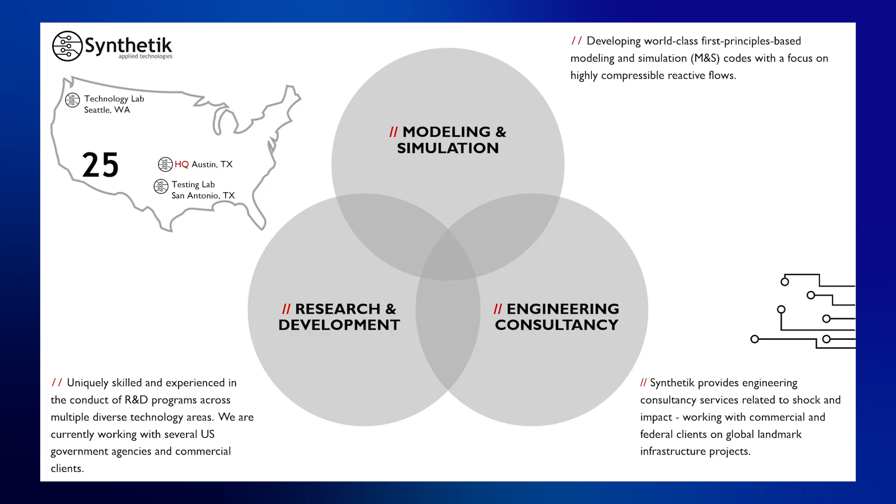And here is that aforementioned M&S team. You'll hear from each of my friends and colleagues as part of this briefing, and Jeff, Ben, and Barlev have done much of the heavy lifting in terms of the code development that you'll see today during the Phase 1 SBIR. And in my opinion, they've done an outstanding job, but I'll let you decide that.

I also wanted to acknowledge Mac, who you can see on the slide here, who worked with us when he was finishing his PhD before moving to a postdoc role at Stanford. He did much of the early work on the blastFEM code to get us in a position to write the successful Phase 1 SBIR application.

So here is a little bit of background and development history to set some context. Back in 2016, we developed a highly compressible flow solver that leveraged the OpenFOAM libraries, and we continued to extend and develop that code as an open source project. Earlier this year, we developed a stripped back, GPU accelerated and optimized version of that which was back compatible, under Dr. Jeff Heylmun, who you'll hear from later in the briefing.

And finally, as a natural progression of that work, we had a strong desire to work with MFEM in order to benefit from the higher order DG schemes, the GPU support, and the ability to run at exascale, pretty much everything that you've heard today. And the development of that code, blastFEM, is the subject of today's briefing.

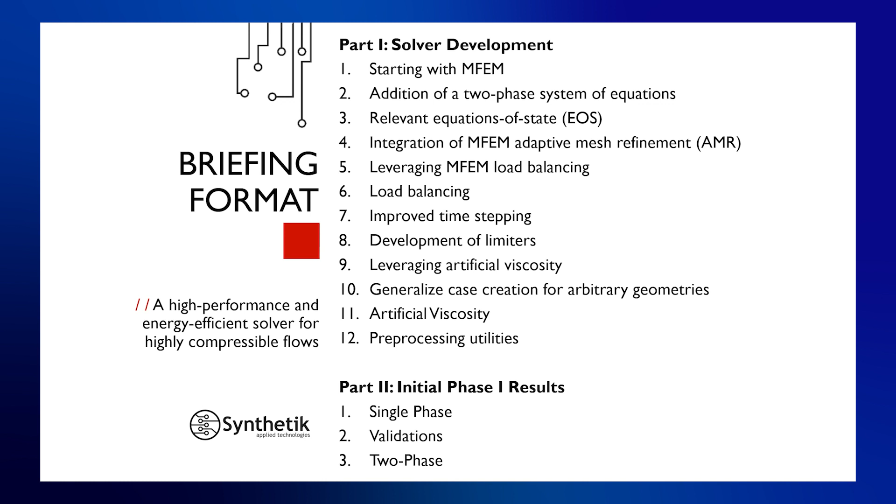So with that context and background set, this is the format that we're going to go through. Ben, Jeff, Peter, and Barlev will pick up different sections of part one and give you a break from my slightly monotone delivery. And finally, Barlev will go through part two, which will be some of our initial Phase 1 results, and then any questions. But Ben, over to you.

Thanks, Tim. So first, we'll briefly cover some of the theory behind blastFEM's development, and then we'll look at some of the features that we've included. blastFEM uses the compressible Euler transport equations. This is a system of hyperbolic nonlinear PDEs, and we use the discontinuous Galerkin formulation, which is an ideal setup for solving highly compressible flows where you have shocks or discontinuities.

As a starting point for development, we used MFEM's example 18 code, which implements exactly this: the single phase Euler equations using discontinuous Galerkin. Next slide, please. We then wanted to extend this to the two-phase Euler system by adding the transport equations for a volume fraction alpha and splitting the density transport into a partial density, one for each gas phase. You can see what that looks like in these equations here. We then had to close the system of governing equations by adding an additional equation for the total density, rho, which we show there.

And that's based on the partial densities and that volume fraction alpha. And finally, we add an additional equation of state, which relates the density, the pressure, and the energy.

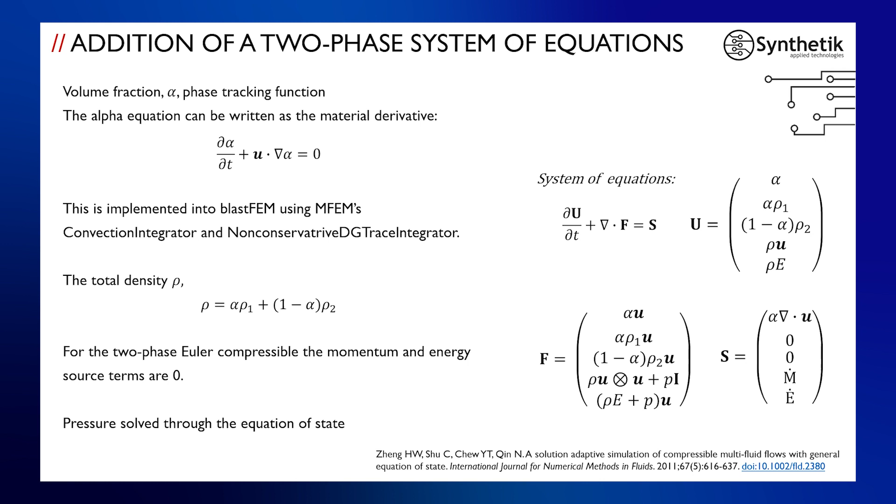Next slide, please. So I mentioned the equations of state. So we've implemented a few different options, including the usual ideal gas equation of state, which I'm sure everyone's familiar with, as well as the stiffened gas equation of state and the van der Waals equations of state. And these are easily selectable by the user, and you can use different equations of state choices for different gases within the same simulation. And we can also easily extend this framework to include a wider selection of equations of state as needed.

Next slide, please. Now, one of the more powerful tools we have at hand for improving the performance of blastFEM is the use of adaptive mesh refinement. That's already available within MFEM's capabilities. So we went ahead and used that so we can add refinement where we have regions of strong pressure or density gradients, and we can coarsen other regions. We can also easily use this AMR to refine near the initial conditions where you have strong gradients. So in this case, where we have an initial region of high pressure, we can refine around that to start with. Next slide, please.

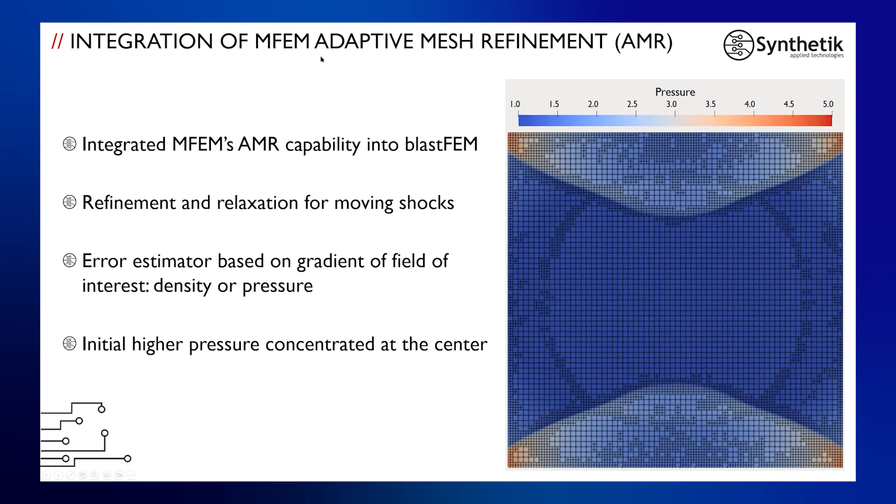Thank you. So in addition to AMR, we can further improve our performance by leveraging MFEM's load balancing features when you're running in parallel. So here we show a comparison of a few different cases. We have uniform refinement on the left. We have AMR without load balancing for the same simulation setup. And you can see already with AMR and no load balancing, we have about a 3 times speed up.

And then finally, we can introduce load balancing as well. And you can see the comparison between no AMR to AMR with load balancing, we have over a 5 times speed up. And so that's just a sort of low-hanging fruit for really improving the performance of blastFEM. This case here was a pretty simple case where we ran it on 12 CPUs with just first-order basis functions, but we can extend the size of this pretty easily as well.

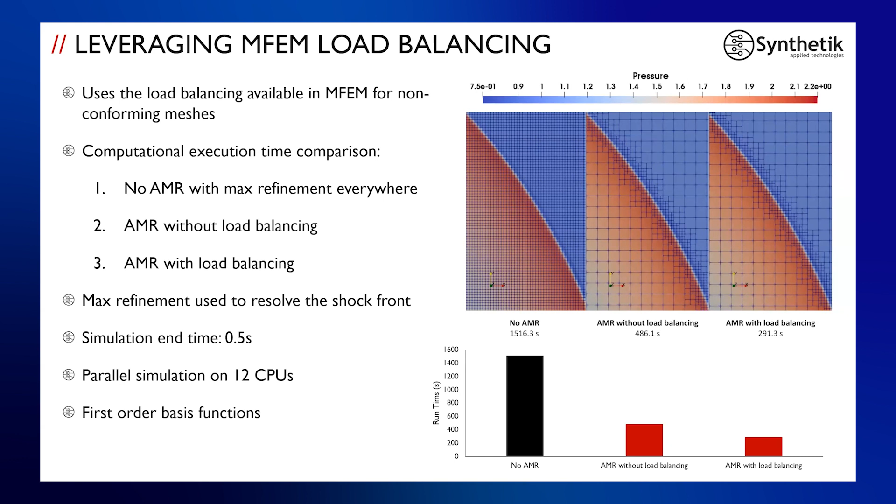Next slide, please. One small change which we made was to improve the time stepping method. So rather than using the smallest element size and the largest velocity over the entire domain, we can look at each element independently. So we can grab that element size and we can look at the velocity inside that element and look at that ratio for all elements and use that to select our time step. And that just helps us to prevent from over constraining the time step, which you might run into with some cases. Next slide, please.

So in some cases, in high order FEM with strong shocks and gradients, you can run into numerical instabilities. This can include oscillations or unphysical states where you have negative densities and pressures, or you can have poor interactions with boundary conditions. And we can help to mitigate this by the use of shock capturing limiters, which is where you place a limit on how much the solution can vary within the element, how much it varies from the average value within that element. And so we based this work on literature, and we are also able to provide the user with input to select how strong they want that limiter to be, or the user can disable the limiter as needed.

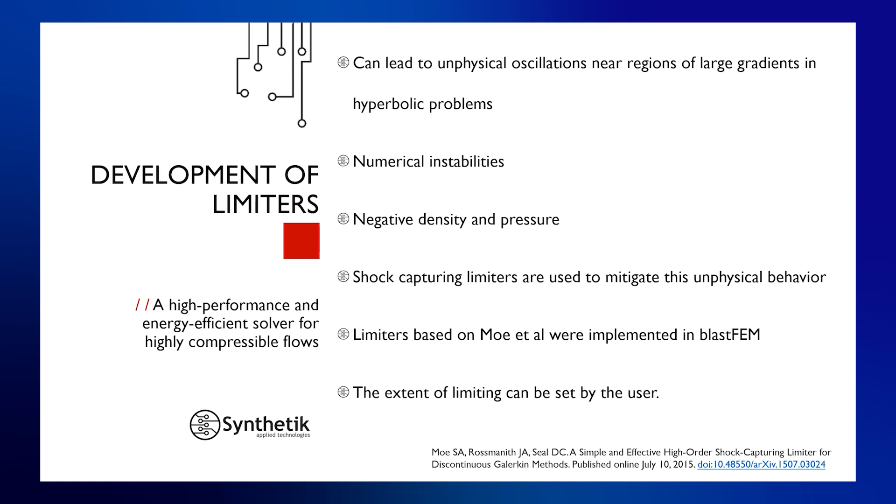Next slide, please. And in addition to the limiters, we have another option to improve the stability, which is artificial viscosity. So for high order FEM schemes where you have shock fronts or discontinuities which you want to track, you also want to be able to resolve that shock within the element itself. And artificial viscosity helps to stabilize that sort of system. So for this, we followed literature as well.

We used a method where we take our solution field, we project that solution down to a lower order field, and by taking the difference between those two fields, that gives us an indication of where you have strong gradients or discontinuities. Using that indicator, we can then apply viscosity to those regions of the domain. And that viscosity is based on the cell size and the basis function order.

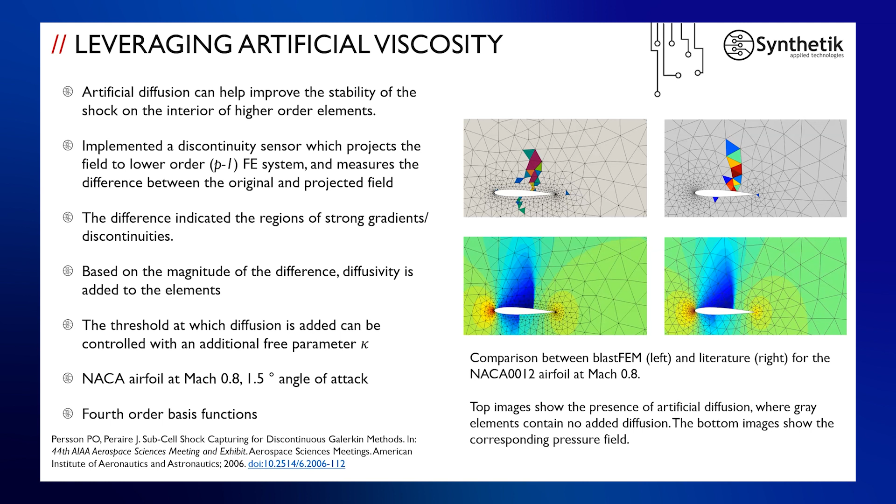Next slide, please. And with that, I will hand it over to Peter for looking at case creation.

Hey, thanks, Ben. So during the first phase of this program, and really as part of making MFEM more accessible to users modeling industrial flows more broadly, we wanted to quickly prototype a CAD integrated workflow. So as such, we adapted our SketchUp to Gmsh extension for use with MFEM. This extension, it's available for free on the SketchUp extension warehouse, essentially converts 3D CAD geometries into valid Gmsh grid generation input files. Conveniently, boundary names, desired element edge lengths, these can all be applied within SketchUp.

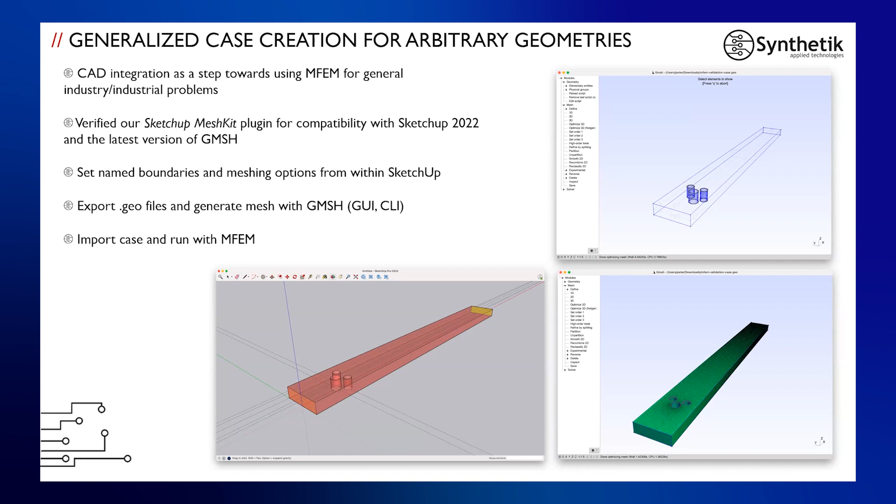We also developed an import utility to import an applied boundary and the initial conditions to the MFEM cases of interest that we're running. This capability, we hope, will provide utility to the MFEM user community, and it's one that we use to support much of our commercial work. So with that, Dr. Jeff Heylmun will walk you through some of the work that we've done creating rich input files and integration within MFEM.

Thanks, Peter. So in addition to the numerical schemes that Ben talked about, we also have had a large focus on simplifying and generalizing the inputs for arbitrary case creation. So this is a sample input, and it's broken down into a couple different sections. So we have our controls, our mesh schemes, phases, and initial conditions. So the control section controls things like the end time, the write interval, and visualization method. These would typically be put in through command line.

For mesh generation, we focus primarily on Gmsh. So if that's used, you can construct your mesh using named boundaries, which can then be used to specify boundary conditions by name. This is also where order and adaptive mesh refinement procedures are specified. Next, you can see the specification of the flux schemes as well as the ODE solvers and the limiting coefficients.

For the phases, this is going to be a two-phase simulation. So we have the first phase, which is going to be an ideal gas, and the second phase, which is stiffened gas. And you can see the parameters specified for both of those. And then finally, we have our initial conditions, which is a combination of an initial uniform or default value for all the fields, and then a selection of simple shapes like spheres, cylinders, or rectangles for different fields. And with that, Barlev will now show some results.

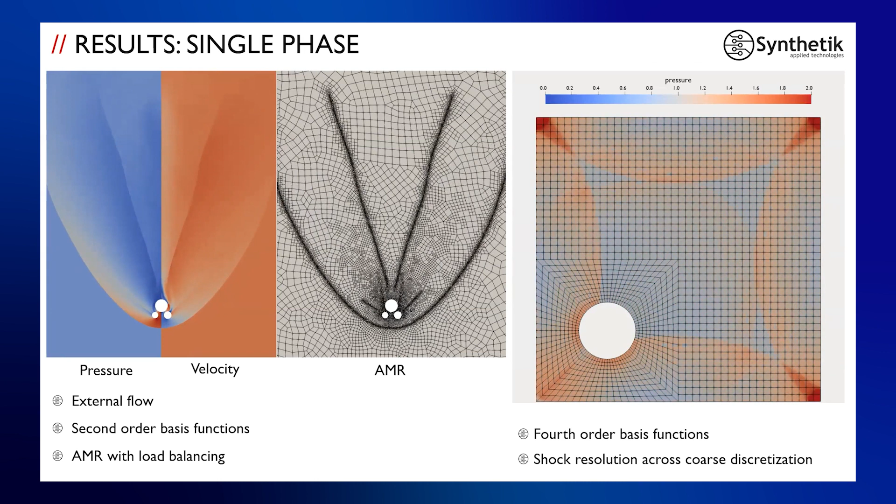Thank you, Jeff. So with the work developed and as described by my colleagues, I'm going to walk you through some of the results that we've gotten with our development work. So first, single phase results. The simulation on the left is an external flow over an arbitrary geometry that was meshed in Gmsh and then imported to be used with our solver. So the flow here is about Mach 2.5. We have a velocity inlet boundary condition at the bottom there, and outflow extrapolated boundary conditions on either side and on the top, and of course a wall boundary condition for the geometry in question.

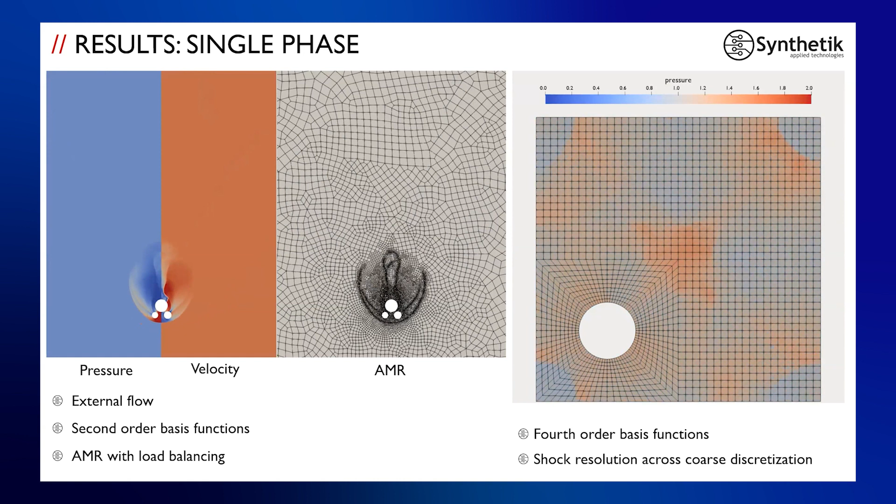This was done with the second order basis function and AMR with load balancing. So you can see that adaptive mesh refinement resolved the shocks in that case. On the right, we have a box essentially with a circular obstruction. So all boundaries here are set with the wall boundary conditions, no penetration. And we've initialized the center with a high pressure in the domain. And you can see that the shock is caused because of that pressure normalization.

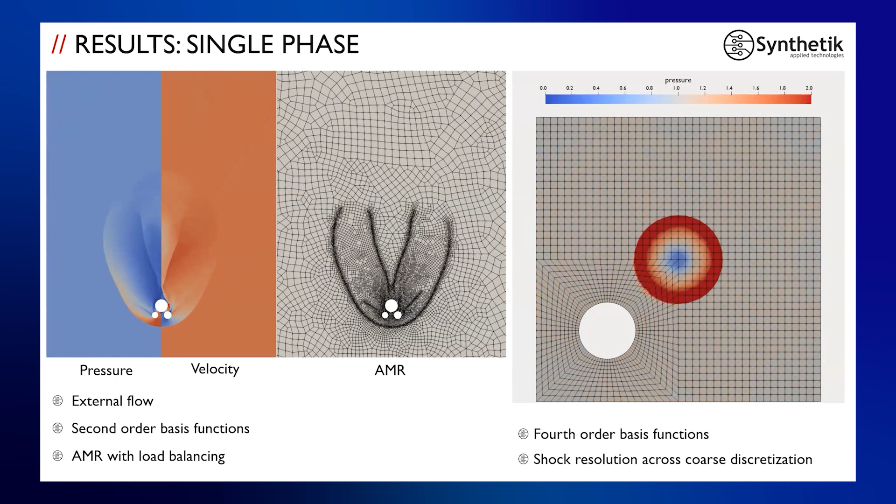So what we're showing here is a fourth order solution on a coarse grid by controlling the limiting that Ben talked about using the limiters that we've implemented. So you can see there's no AMR, and you can see that that shock is well resolved. Moving on to the next slide. We've done some validation of the single phase code that we have.

So the result on the right is a shock tube that's 100 meters long. And this configuration begins with equally partitioned regions of high pressure and density on the left and low pressure and density on the right. So as we run this case out, the shock traverses to the right, and there's a rarefaction wave that evolves on the left. So what this picture shows here is a comparison of the simulated result and an exact solution. So you can see that it's pretty spot on.

We've also done some validation with the NACA 0012 airfoil geometry under transonic flow conditions. So you can see that shock that's formed on the top surface of that airfoil. We've computed the coefficient of pressure on both surfaces and compared it to the literature.

And you can see that it's a pretty comparable result, especially that location and strength of the shock there is consistent with our findings.

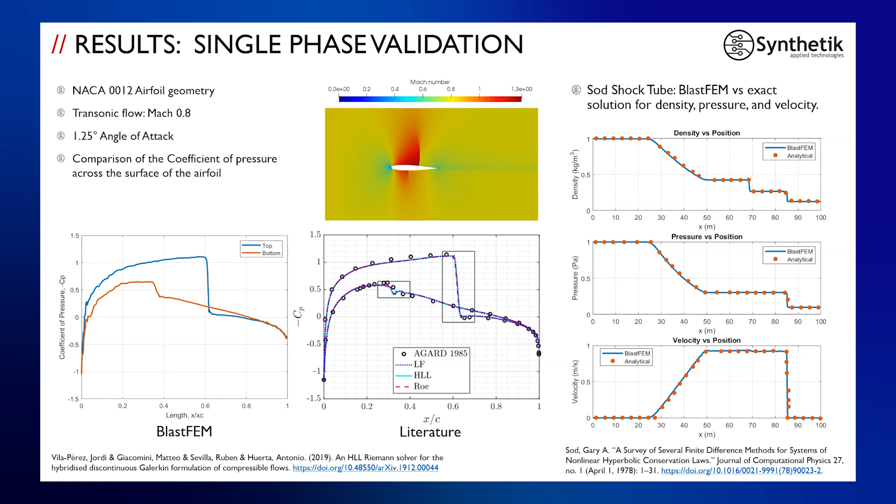Moving on to the last main result, which is two-phase. It's a two-phase system. Here we have two fluids, the fluid with a higher density and pressure is set at the center there. So we're looking at a pressure ratio of about 20:1 and a density ratio of the fluids of about 2:1.

So here we're showing the fields in question. You have a volume fraction field on the top left there. We have the transported masses for both, and the total density on the right. On the bottom row, we have pressure, the energy, and velocity magnitude. So both phases here use the ideal gas equation of state. We've done the simulation with AMR and load balancing, as you can see in the bottom left animation there.

And what I want to point out here is that the top and the bottom boundaries have no penetration. They're wall boundary conditions, and we have an outflow boundary condition on either side. So as that pressure normalizes, fluid 2, which is surrounding that central fluid 1, is pushed out, and the pressure waves reflect on the top and the bottom walls. And as it comes back, it compresses that fluid 1, moving it outwards to either side.

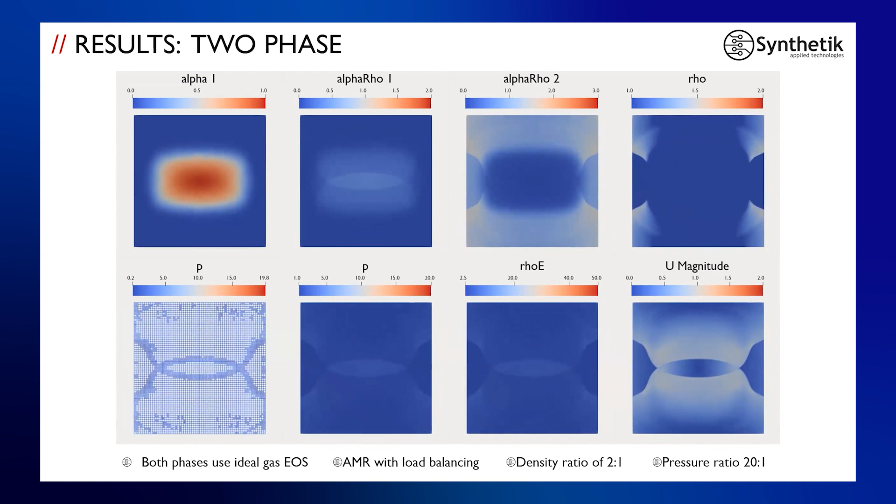So to sum up, we have an early development of a framework that handles single-phase and two-phase systems of Euler equations for highly compressible flows. We've leveraged MFEM's utilities such as AMR and load balancing, and we've implemented methods for shock capturing. We've also put it all together and implemented a pre-processing utility which would help a user set up a simulation with ease. We'd love to hear from viewers and potential users or contributors with any feedback.